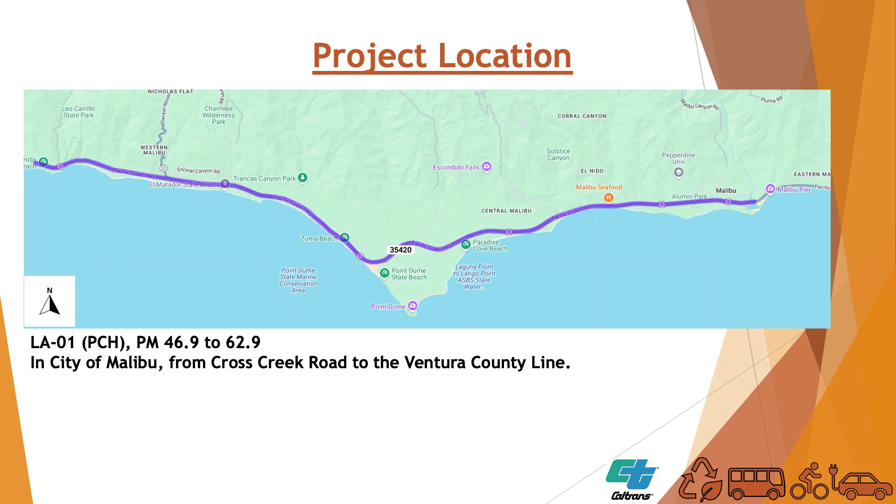The purpose of the project is to fix the pavement. The goal is to extend the surface life of the roadway, improve the ride quality, and that will minimize the maintenance needs, which will minimize the maintenance worker exposure. We understand safety is a major concern on this PCH, so we also incorporate upgrading complete street features and upgrading the safety features.

Next, I'm going to turn it over to our design engineer to go over the proposed scope of work.

As you can see on the exhibits, pavement rehabilitation: we're going to cold plane and overlay with rubberized hot mix asphalt. That's the main purpose of the project, the overlay.

Then we go to complete street elements. We're going to upgrade and add new ADA curb ramps, approximately 20 of them, and we're going to add new sidewalks. If I remember correctly, it's around 6 new sidewalks that do not exist, so we will be adding those. We're going to enhance crosswalk striping. Next is audible pedestrian signals, countdown pedestrian signals, and bicycle detection. And we're going to add class 2 bike lanes at 3 segments.

Next slide, safety items. We're going to upgrade the guardrail system, the existing MBGRs. We're going to install Qwick-Kurbs for traffic channelization. We're going to add 20 new lights throughout the segment. We're going to replace and install new roadway signs within the project limits.

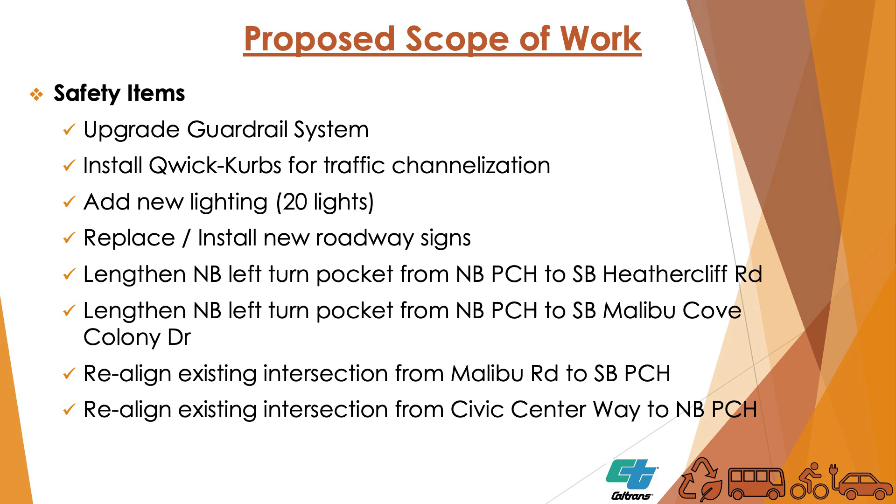We're going to lengthen the left turn pocket from northbound PCH to southbound Heathercliff Road. Then we're also going to lengthen the northbound left turn pocket from northbound PCH to southbound Malibu Cove Colony Drive. And we're going to realign the intersection where southbound PCH meets Malibu Road from a skew to a T intersection. The last one below is we're going to realign the intersection at Civic Center Way to northbound PCH, same thing, from a skew to a 90-degree intersection.

Next slide, design challenges regarding the bike lanes. Widening may require a higher environmental document process, so we're not doing widening on this project, so that's why the bike lane is limited.

Right-of-way constraints - we have a lot of right-of-way constraints. We don't have space to add bike lanes at some locations because we don't own the right-of-way. We have parking constraints, we cannot remove parking. And roadway lane width constraints - the lane widths have to be a certain width. We cannot take away lanes or reduce them further than the standard.

Multiple segments regarding the class 2 bike lanes. We're going to be adding bike lanes and we're going to reduce the lanes to 11 foot, from 12 to 11. And the raised median at many locations throughout this segment, from 12 foot to a 2 foot raised median. That will add space so we can have additional bike lanes.

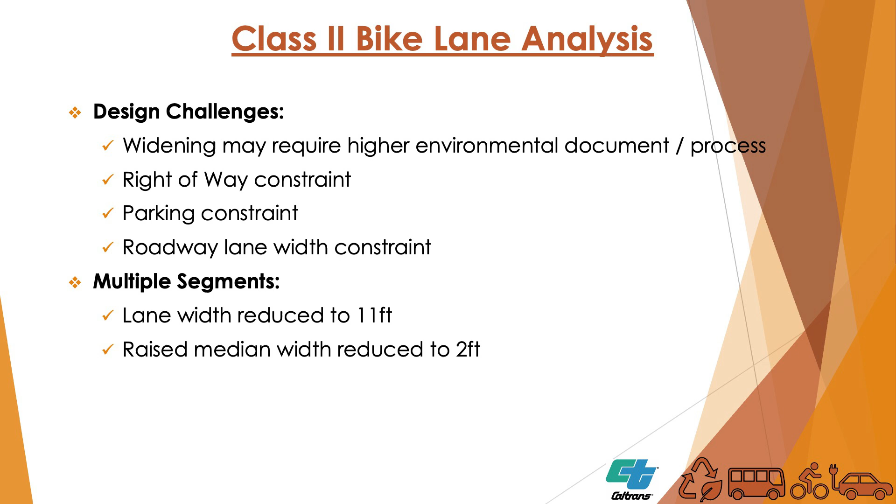Class 2 bike lane throughout this project: going northbound is going to be 22 segments, coming southbound, 22 segments, 22 pieces of bike lanes. If we look at the exhibit, going northbound is about 7.7 miles, coming southbound 7.1 miles. We cannot have it continuous, as I'm going to explain later. It would be nice, but so we have it in segments, the bike lanes, which is 22 in either direction.

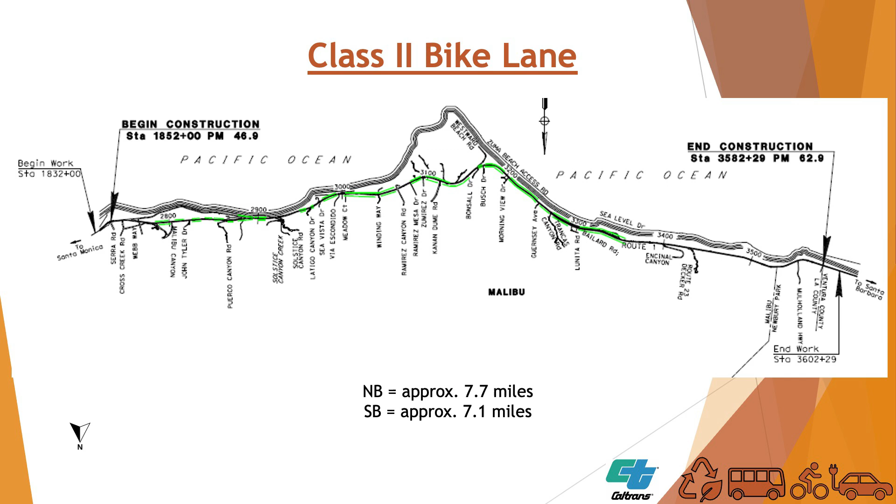Class 2 bike lane cross section, this is a typical section. What is a Class 2 bike lane? Class 2 bike lane is a bike lane by itself, a stripe by itself, next to the shoulder, on the highway. So it's a lane for bike lanes.

Not a protected lane - that's a problem. It's its own lane. How's it protected? There will be time for questions during the Q&A if you just want... I just asked, you kept saying Class 2 bike lane. I understand, yeah, I'm glad we clarified. We'll do questions at the end.

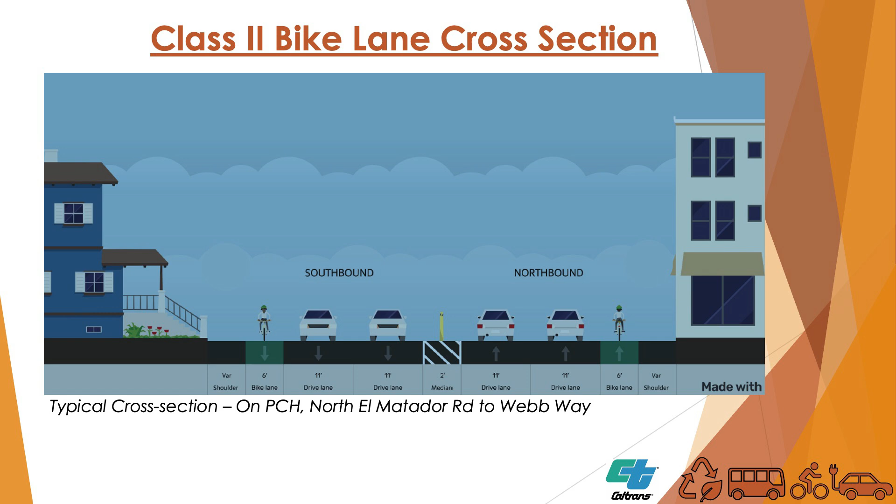Thank you, yes. And this is a typical section of a class 2 bike lane. On northbound PCH, this is within the project limits from El Matador - it's not throughout the project limits, it's from El Matador all the way to Webb Way. We're going to have a bike lane in both directions, as you can see, a bike lane by itself, striped in the northbound and southbound direction. That's for the bike lane section.

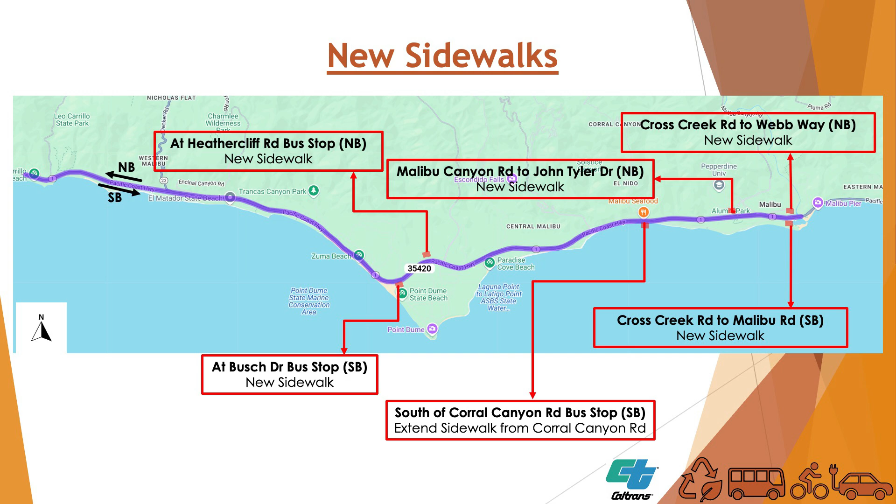Now we can go to the next exhibit. We have new sidewalks. The new sidewalks, as you can see, at 6 different locations. And there are locations where we need sidewalks - we don't have sidewalks, we have a bus stop with no sidewalk. So these sidewalks will provide continuous use for users. 6 new sidewalks throughout these project limits.

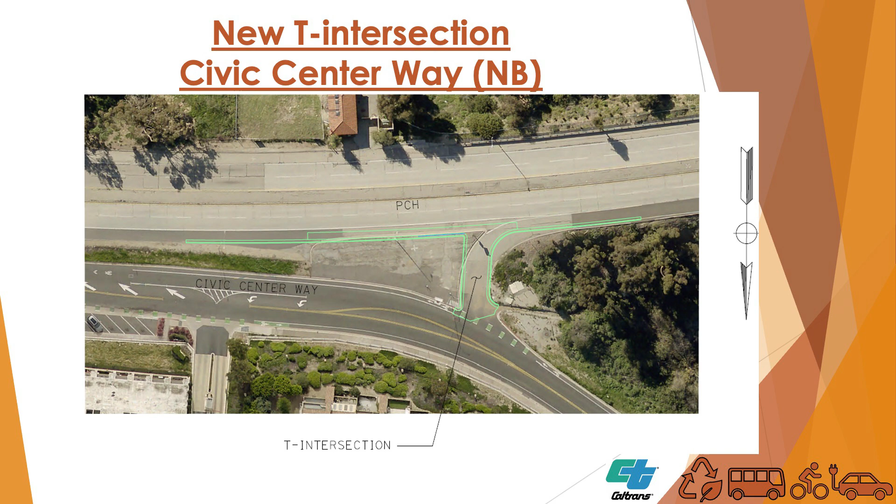This is, as I mentioned before, a new T intersection, Civic Center Way going northbound to PCH. From a skew, it will be a T, a 90-degree intersection, as shown on this exhibit.

Next exhibit, this is a new sidewalk along with a T intersection at Malibu, going southbound, which is on the north side, or the upper side of the exhibit. And on the lower side, we're also adding a sidewalk from Cross Creek all the way to Webb Way.

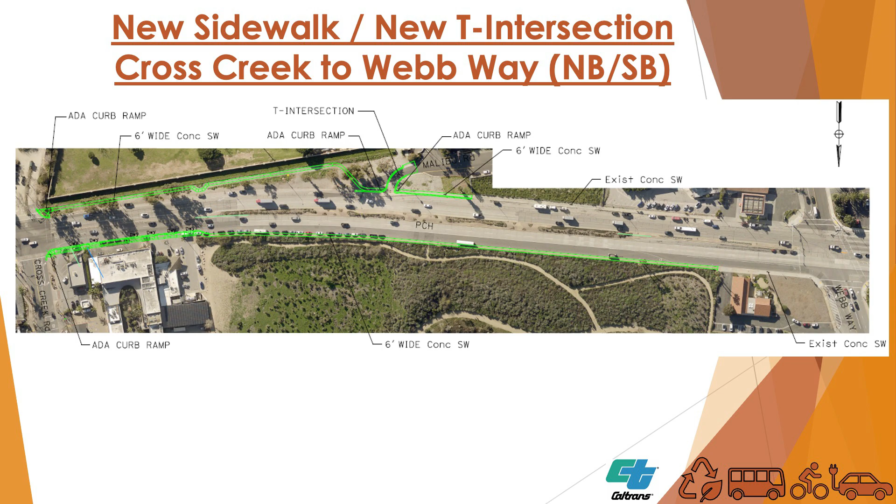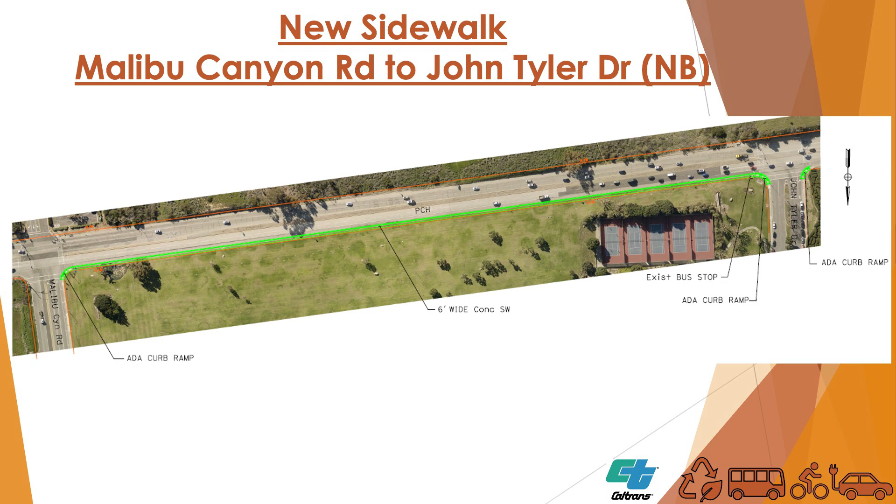So we're adding a sidewalk on both directions, southbound and northbound, and we're adding that intersection. Next slide, new sidewalk from Malibu Canyon Road to John Tyler. Right now it's just a grass area, so we're gonna have a continuous sidewalk from curb ramp to the other curb ramp. Next, a new sidewalk south of Corral Canyon in the southbound direction.

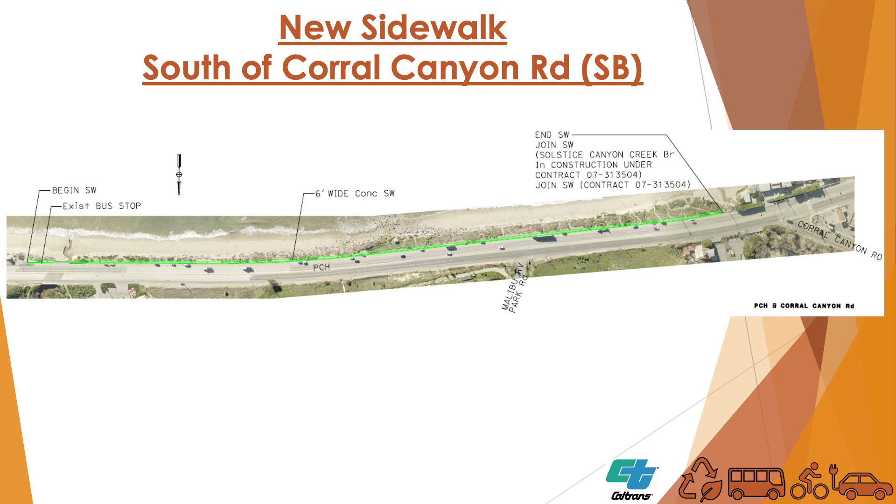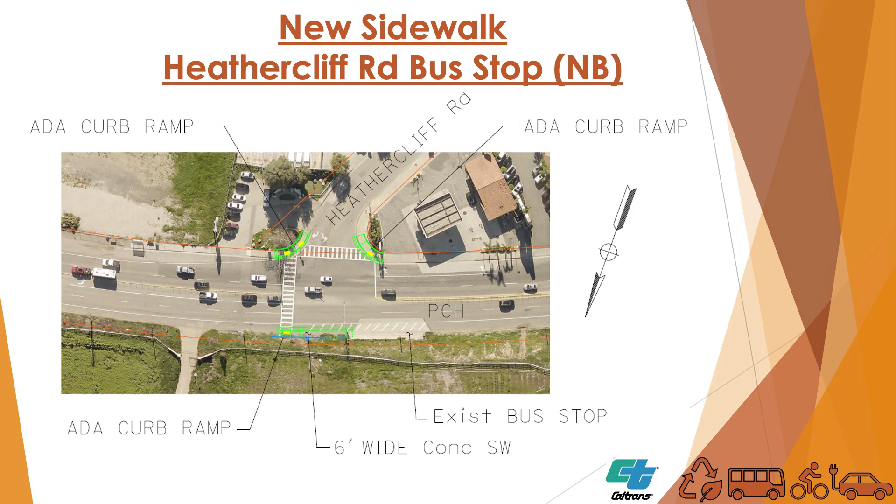The whole stretch, as you can see on the exhibit. Next, we're also gonna have a new sidewalk going northbound on PCH. We have a bus stop at Heathercliff, but from the bus stop to the crosswalk, it's a dirt area. We're gonna add a sidewalk so there's a connection. Also, we're gonna add a sidewalk at Busch Drive. There's a bus stop, there's no sidewalk. We're gonna add a sidewalk there.

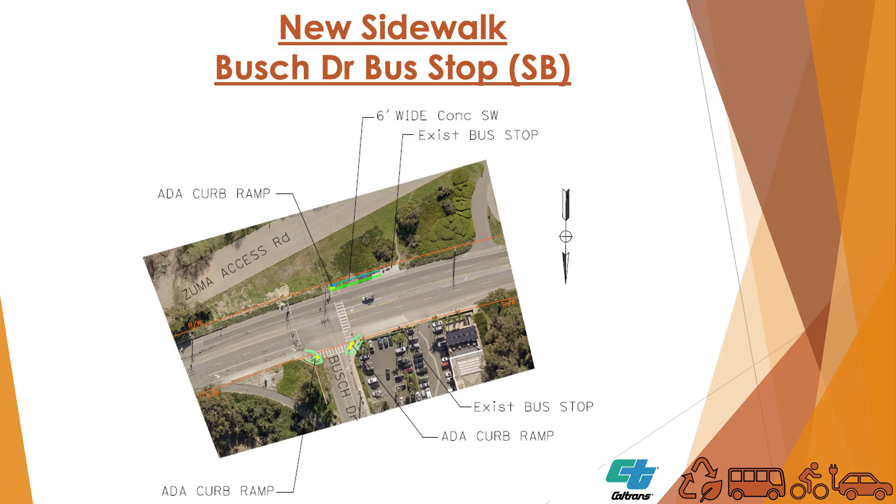Now regarding the project schedule. So project schedule, right now this project is currently in design phase. It started back in 2022. We are targeting to complete it this fall, 2025. Construction will start next summer, 2026. It's about 2 years, so we end around summer 2028.

So that concludes the north segment. Now I'm gonna go on the south segment, and this is from McClure Tunnel to south of Cross Creek. Project location for this one, again, is on PCH. Post mile is 35.2 to 46.9, so it's about 11.7 post mile. This footprint actually crosses over 4 cities, from the south end at the City of Santa Monica to Los Angeles, then to Topanga community, and lastly to the City of Malibu.

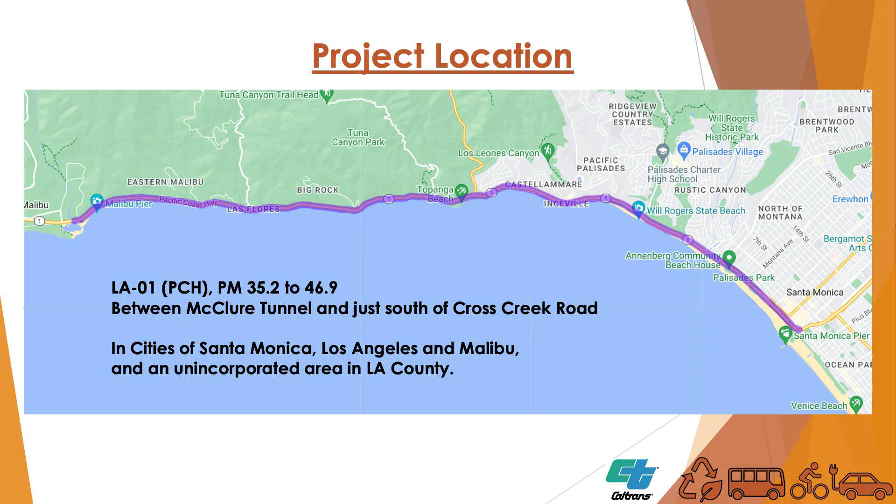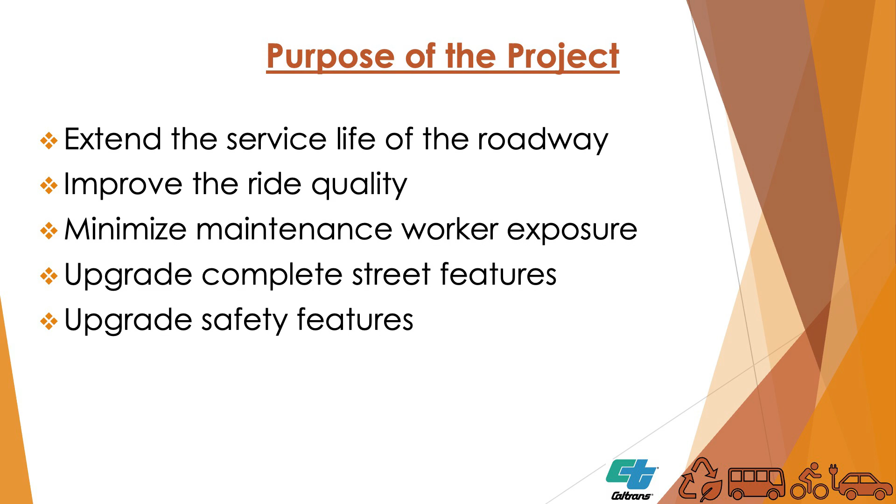Similar to the other project, the purpose of the project is to fix the pavement, extend the service life of the roadway, improve the ride quality, minimize maintenance need and worker exposure. And again, we understand safety is a concern. We are also incorporating and upgrading complete street features and safety features.

Yes, like Janice said, similar to the other segment, we're doing a pavement rehabilitation. We're going to cold plane and overlay with rubberized hot mix asphalt. Second, there are locations where the pavement is damaged, so an overlay will not work. So we're gonna completely replace the structural section at those locations, and transit stop improvement.

There are 30 bus stops that have asphalt pavement. We're gonna remove the asphalt pavement. We're gonna put white concrete, PCC concrete, to make it more durable. That's at the bus stops, 30 of them.

Complete street elements: we're gonna upgrade 22 new ADA curb ramps. We're gonna add new sidewalks and crosswalks at particular locations. We're gonna enhance the crosswalk striping, and same as the other project, audible pedestrian signals, countdown pedestrian signal heads, and bicycle detection. And same as the other project, we're gonna add class 2 bike lanes on this segment also.

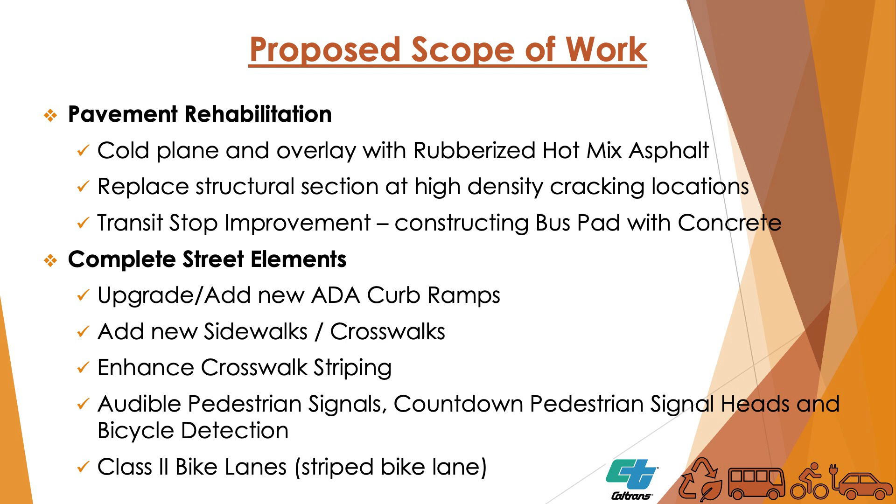Regarding safety items, we're gonna upgrade the guardrail system. We're gonna install Qwick-Kurbs for traffic channelization at 15 locations. We're gonna upgrade the lighting at 2 tunnels, the Roosevelt Tunnel and the Beach Tunnel. We're gonna replace and install new signs throughout the project limits for 12 miles. And we're gonna add CCTV cameras around the Roosevelt Tunnel on the outside for safety.

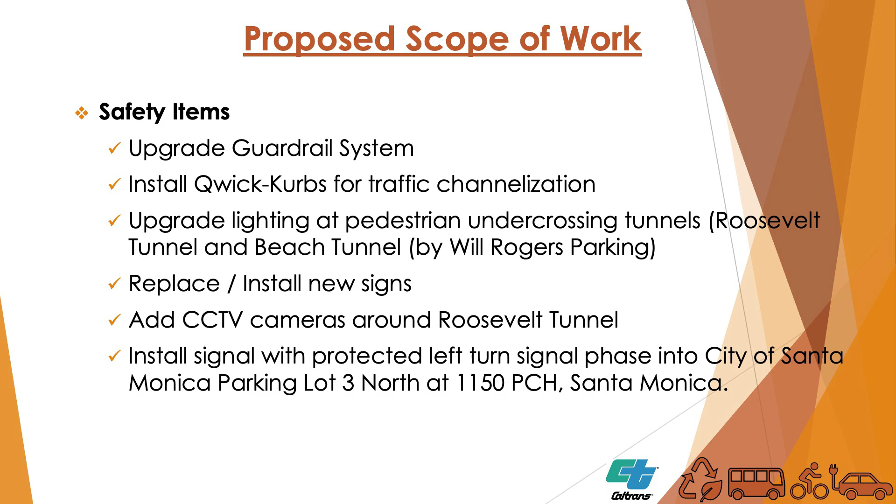And at a particular location, which is going northbound at the City of Santa Monica parking lot 3 North, we're gonna add a signal, a brand new signal for persons to make a left. New bike lane, crosswalk, and sidewalk. Those are the locations, the sidewalks are in red. 1, 2, 3 locations, with 2 locations with sidewalk and crosswalk, 3 locations. And then we're gonna have the bike lanes, 3 locations for bike lanes.

Or can we go to the previous one? I just wanna show the 3 locations, one going northbound and 2 locations northbound and southbound, which is close to the beginning of the project.

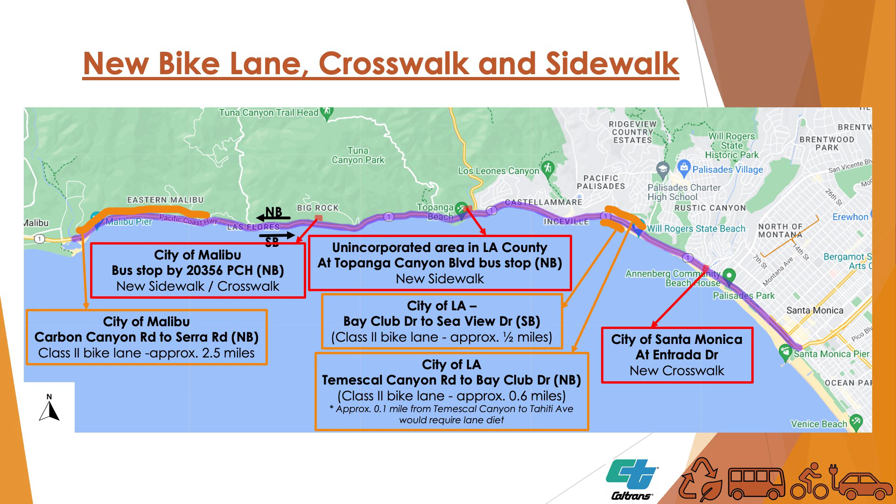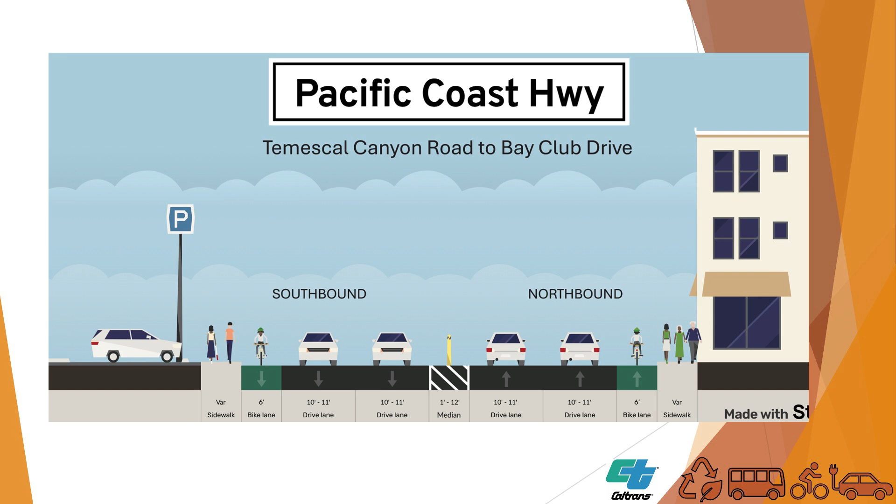Next slide, this is a typical section of the bike lane from Temescal Canyon Road to Bay Club Drive. We're gonna have a bike lane on both directions, southbound and northbound, throughout this stretch between these two streets. Next slide, going northbound from Carbon Canyon all the way to Webb Way, only in the northbound direction we can have a bike lane.

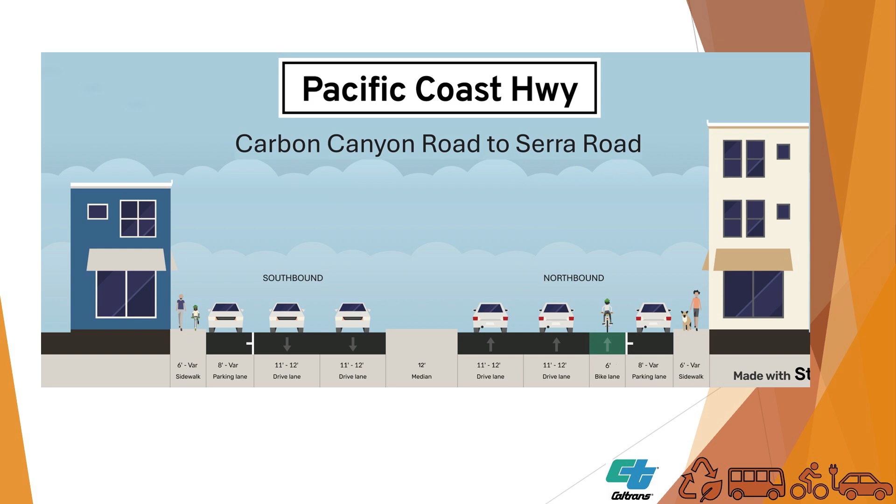This is more in detail of what I mentioned before. New sidewalk and crosswalk at this address, 20356. Sidewalk, we have a bus stop, there is no sidewalk, we're gonna add a sidewalk. Then we're gonna add a crosswalk so persons can cross to the other side.

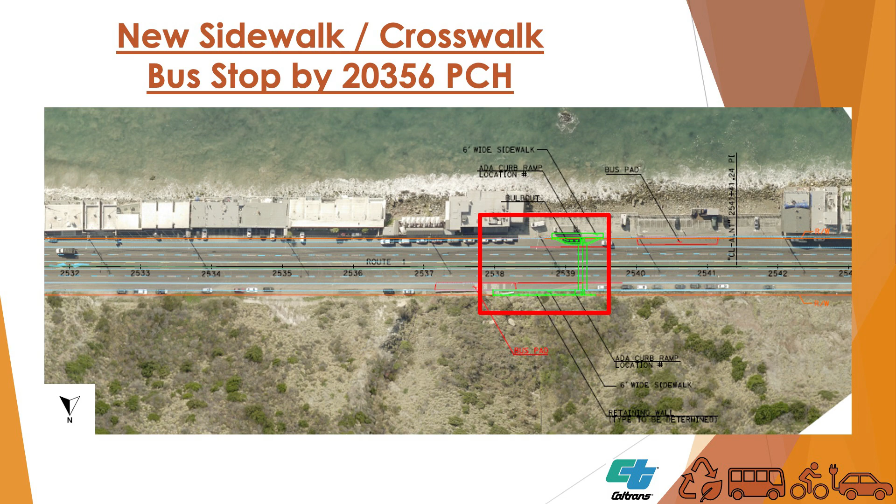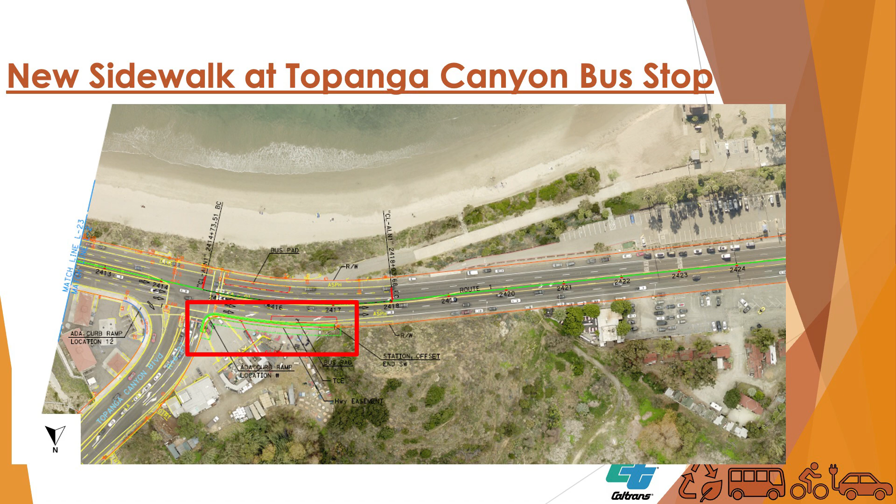At the corner of Topanga Canyon and PCH, a new sidewalk. There is no sidewalk there currently; there used to be a nursery there, so we're going to add a sidewalk. Next, at Entrada Drive, we're going to add a crosswalk with a signal for pedestrians and handicapped persons to cross from one side of PCH to the beach side. This is a new crosswalk.

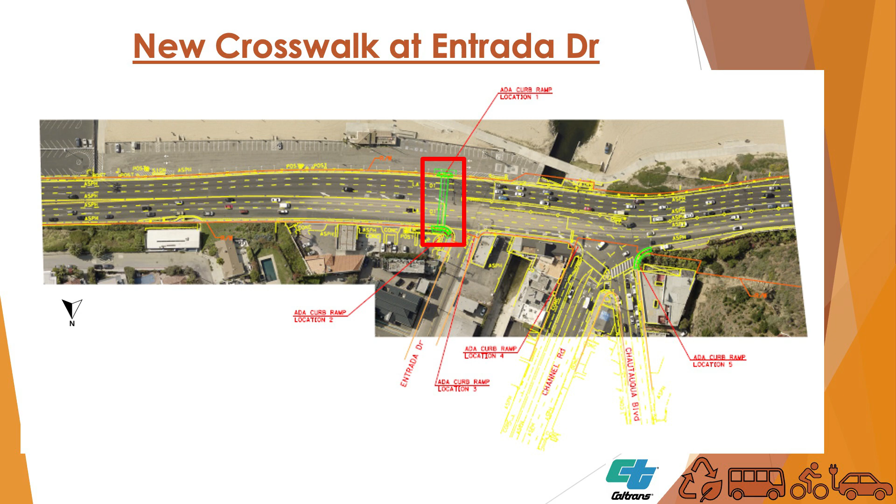Regarding the project schedule: this project is currently in the project approval and environmental document phase. We're finalizing our scope and completing our environmental document. We started summer 2022 and are targeting completion spring 2025. Then design will start, targeting completion winter 2026. Construction will start summer 2027, approximately 2 years, ending around summer 2029.

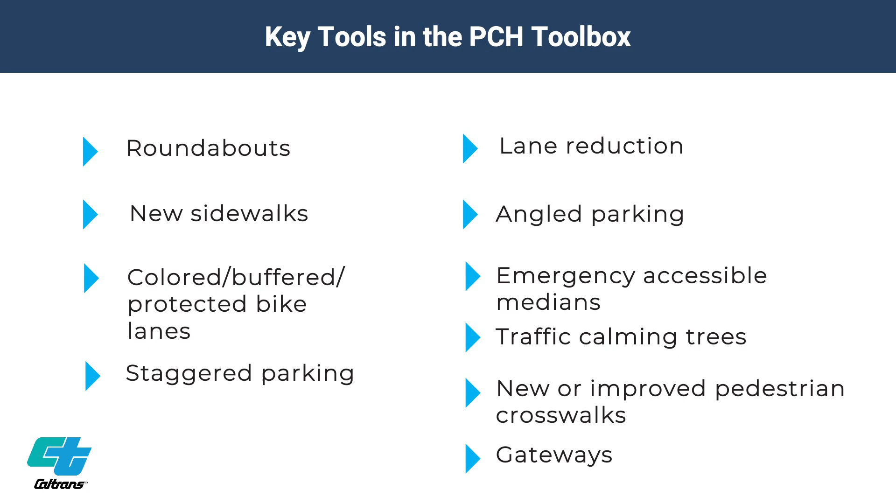So with all of the analysis that we did, crash analysis, we spent time in the field, we talked to you, and have come up with a list of tools in our toolbox that we're applying at different locations - roundabouts, new sidewalks, colored buffered protected bike lanes, staggered parking. We've got lane reductions, angled parking, emergency access medians. We're looking at using traffic calming trees to do that, improved pedestrian crosswalks and gateways. So a set of tools that we're applying here.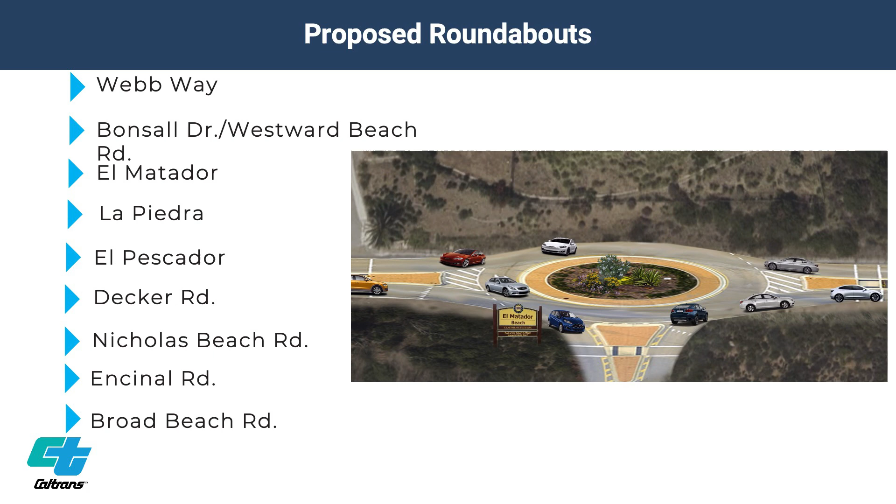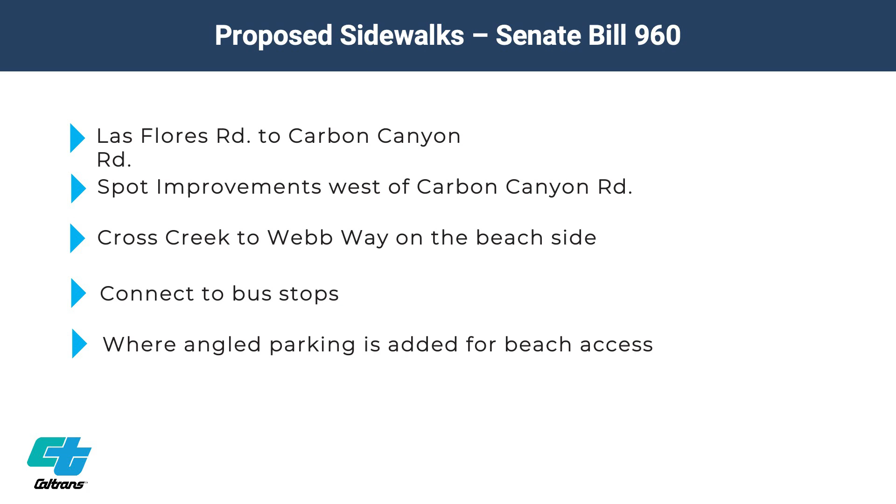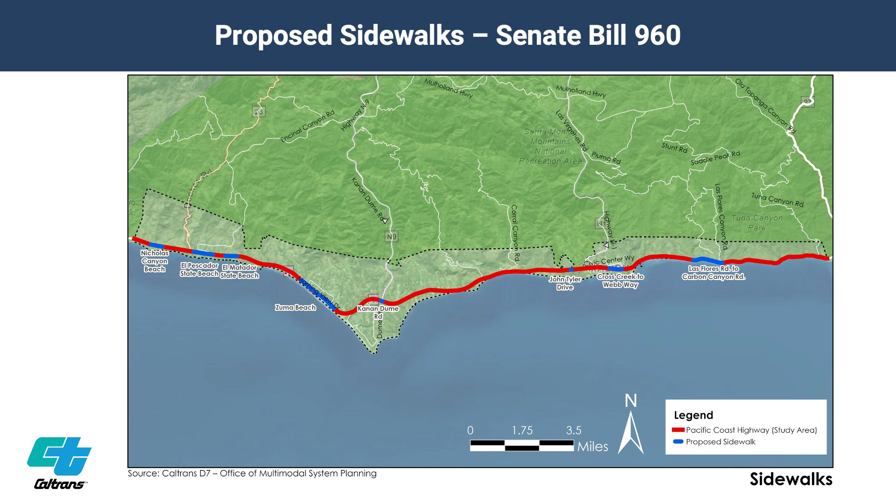We do have some proposed sidewalks, and the biggest sidewalk, or the longest segment of sidewalk that we're proposing, is between Las Flores Road and Carbon Canyon Road. There is no sidewalk there, and that is something that we really have to add per the Americans with Disabilities Act. It's also within Senate Bill 960, so a really important feature there. West of Carbon Canyon Road, there are some spot improvements, some locations where there's very little sidewalk, or there's a sidewalk but there's a mailbox or a tree in the middle of it. Those will have to be remedied.

Cross Creek to Webb Way on the beach side - I think in the other project they're already working on that one - and some of the connections to bus stops will also be done during the capital improvement maintenance projects. We're proposing in some locations angled parking for beach access, and where we've got that, we'd like to add sidewalks so people have a place, so they're not parking on the road and walking along the road to get to the beach. They'll have a sidewalk to walk on.

And the proposed sidewalks here, again, the location between Las Flores and Carbon Canyon. But these are the locations I mentioned. The ones at the north end are really where we're looking at the angled parking and adding parking spaces on the beach side. And these will be places where we would remove parking on the mountain side, just have it on the beach side, but have a place for people to walk there.

We are proposing colored, buffered, or colored and protected bike lanes. And by the way, we've got options. This is a feasibility study, so we've determined what's feasible. For these road segments, in many locations we're showing 2 or 3 potential alternatives, with the selected one to be chosen at a later time.

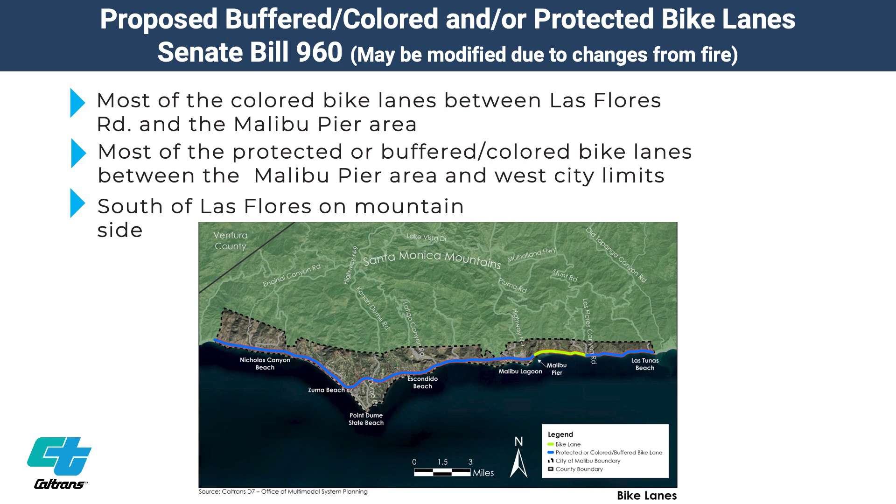But you'll see in the blue there, it's either buffered and colored—a big improvement over what we've got now—or protected. The green area shown is between Las Flores and, I believe, Carbon Beach Terrace, maybe even a bit further north around the pier. There's parking on both sides, and it's really difficult to put protected bike lanes in when there's parking that way, because there's a lot of interference between the parking and the protected bike lanes, plus sight distance issues with people coming in and out of driveways. So in that area, we're really looking at buffered bike lanes.

We're proposing staggered parking. The purpose, and to answer your question Helen about removing parking, is that we're removing parking along some stretches of PCH to accomplish three things. One, we don't want people parking on one side of the road and running across to the other side—a real safety hazard that's very common today. Two, we don't want people parking along the highway and walking along the highway, another common safety hazard. Third, we believe SB 960 is telling us we need to put bike lanes in, and if we don't remove parking on one side, we don't have space for the bike lanes. So this solves three problems.

We've only done this in areas where we believe the parking we have left is adequate to serve the demand that's out there. So it's a trade-off, but we believe the safety issues are worth the trade-off in these locations. And we'll see later on that we've actually added quite a bit of parking.

Here's a place where we're leaving the parking on the beach side in the map, like Latigo Canyon. The Latigo Beach, Winding Way, Paradise Cove area is really where this comes out the most—leaving parking on the beach side where it's most needed. Where we've got the Winding Way trailhead to Escondido Falls, we left parking on the mountainside because people need to park on that side, but not the other side. So we've gained the space from removing parking in those locations.

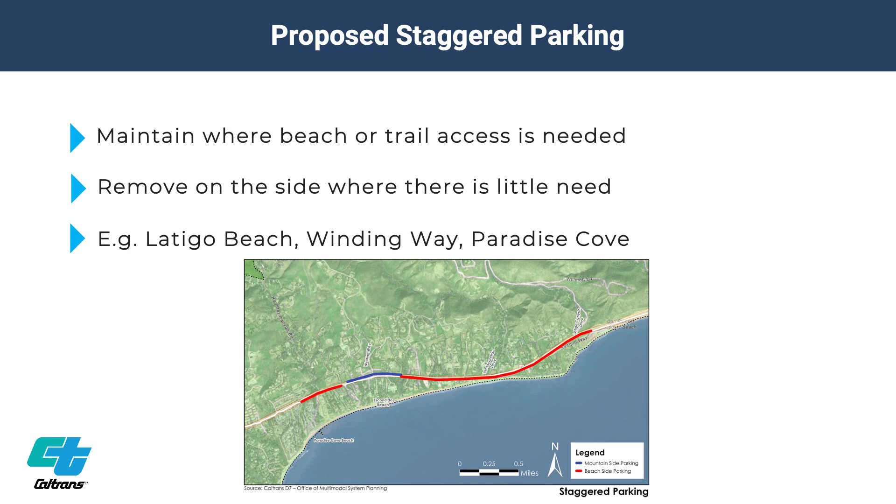Proposed lane reductions with some angled parking. Once we get west or north of Trancas Canyon, whichever you want to call it, traffic volumes come down quite a bit. So we're proposing to come down to one lane in each direction, or one lane with a passing lane in some locations. This gives us space for the bike lanes, but again, angled parking on the beach side—so we're actually adding parking. I'll show a table on this a little bit later on, but it comes along with parking on just the beach side.

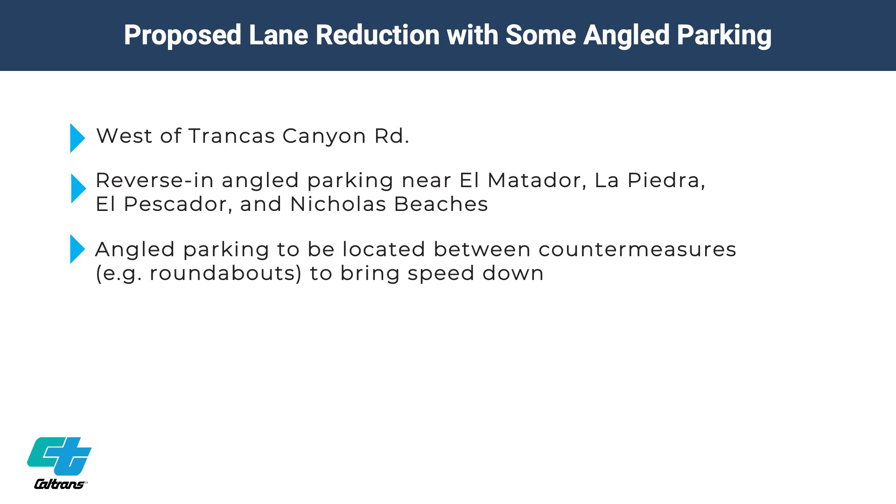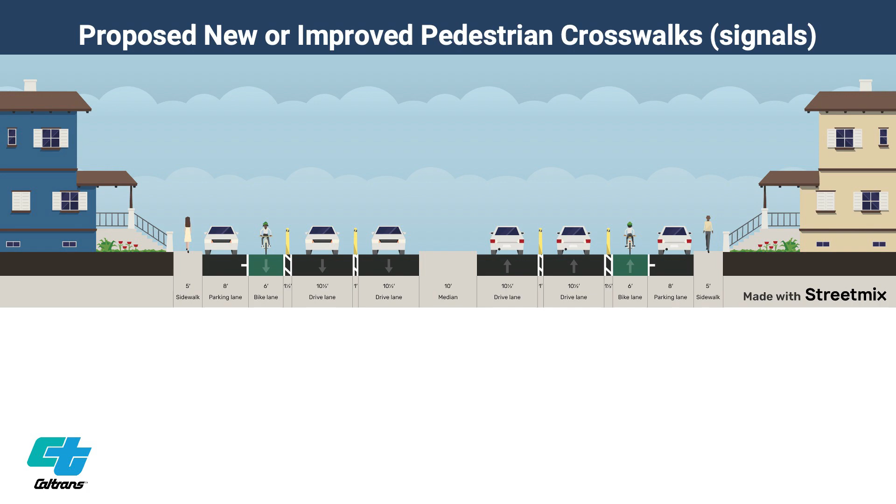So the new and improved crosswalks, especially in the area between Las Flores and Carbon Beach Terrace, where a lot of crashes have occurred and there are speed issues—we're trying to do a number of things. We're trying to make it safer to cross the highway, but we're also trying to introduce things like quick curb delineators to channelize the traffic and slow the cars down at the crosswalk. Here's a potential treatment where we've got the channelization, the bike lanes, crossing islands, and possibly even a speed table we're going to look at. This type of treatment in that area with a lot of speeding, we believe, can help slow the traffic down and make it a much safer crossing. If we've got several of these, it should have some impact on slowing traffic throughout that area.

And we're adding—so you asked, Damon, about the Rambla Vista bus stop.

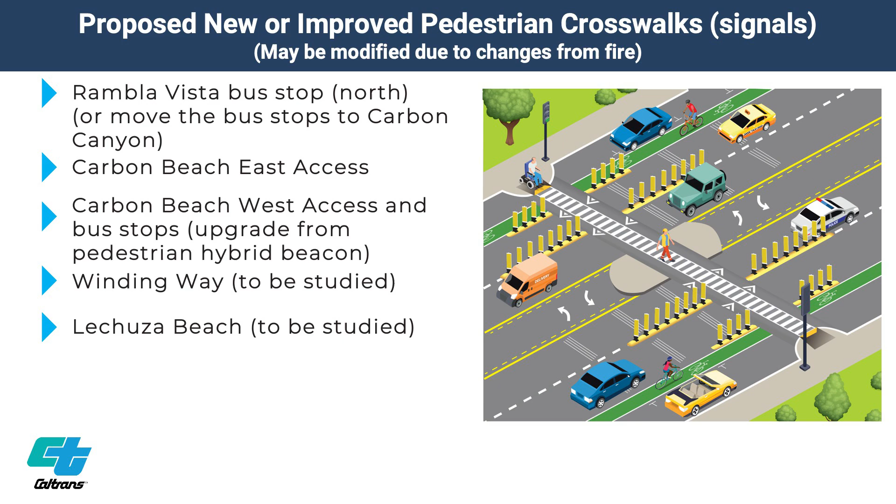Either add a crosswalk there or move the bus stop to Carbon Canyon. That's the other option in that location. At Carbon Beach east access, we're going to have an improved access or crossing. At Carbon Beach west access, there's a crossing there now, but we're going to upgrade it to a full signal and this type of treatment. Winding Way is to be studied, and Lechuza Beach is to be studied. Those are also possible new crosswalks.

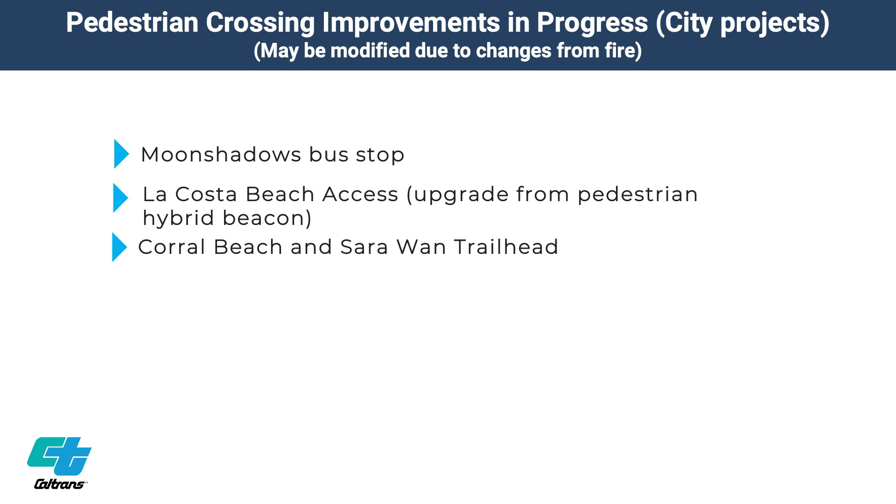Some other crossing improvements that we have, and these are already things the city's working on: the Moonshadows bus stop, which the team here is already putting in. The La Costa Beach access is upgraded from a hybrid beacon to a full signal. And then at Corral Beach and Sara Wan Trailhead, a crossing there as well.

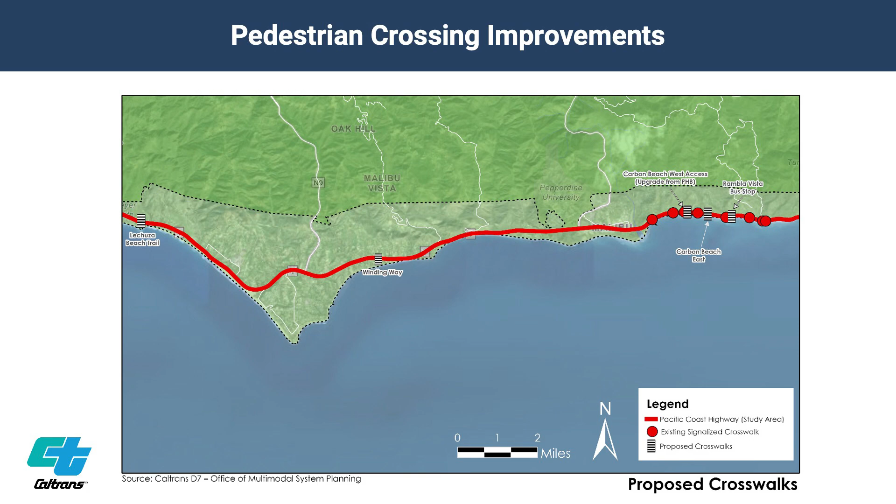We don't know, and as you'll see in some of these slides I put in, the fire may have changed what actually gets done, because we don't know at this point what's going to happen with rebuilding of Moonshadows or the residential properties or anything. So we have to proceed with what we know for now. It's an open question. This is a map showing the pedestrian crossing improvements.

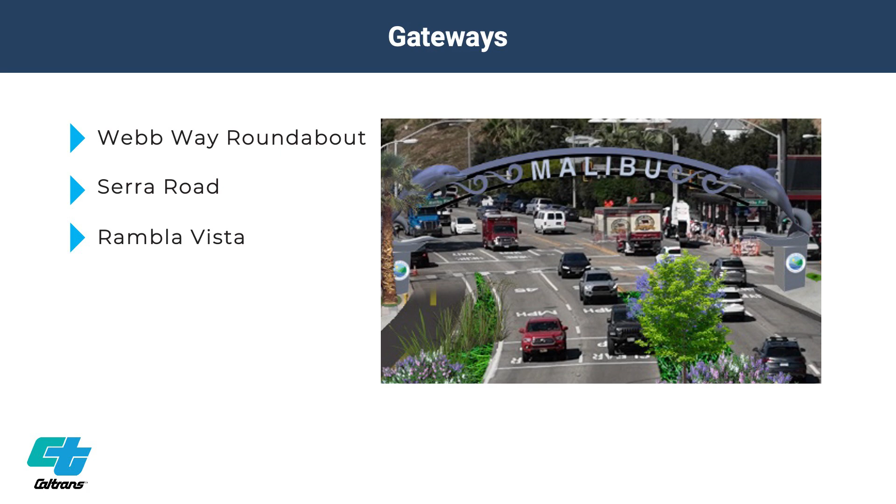Gateways were something that we floated as an idea, and it was really popular, both in the workshops and in the surveys. We like the idea of gateways. They're an opportunity to help do what we call bringing character to the community, placemaking, and they could be an opportunity for public art. This is just a sample of a could-be gateway with some dolphins on it, but these could be art projects that reflect the character of Malibu.

One of the things I know you're trying to do with this project is transform this from a big highway to something that fits within the context better, and this is an opportunity to do that. Gateways also slow cars down. People understand when they go through a gateway that they're entering a new context, and we want them to understand that. It's a tool to help do that.

So we're looking at three possible locations for gateways. One, the Webb Way roundabout, will be like a gateway itself, but Serra Road and Rambla Vista are also possible locations, and more could be put in as well.

Now we have cross sections for the entire length of PCH in Malibu, and I could show you all of them. In the interest of time, I'm going to show some samples, but I've got other slides hidden in case there are any segments you want to see that you don't see. These are some samples of the types of things we're proposing for every segment.

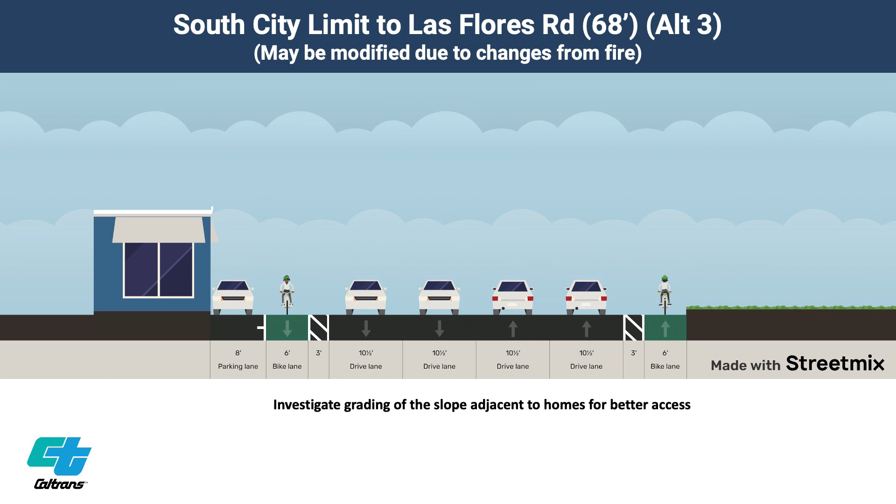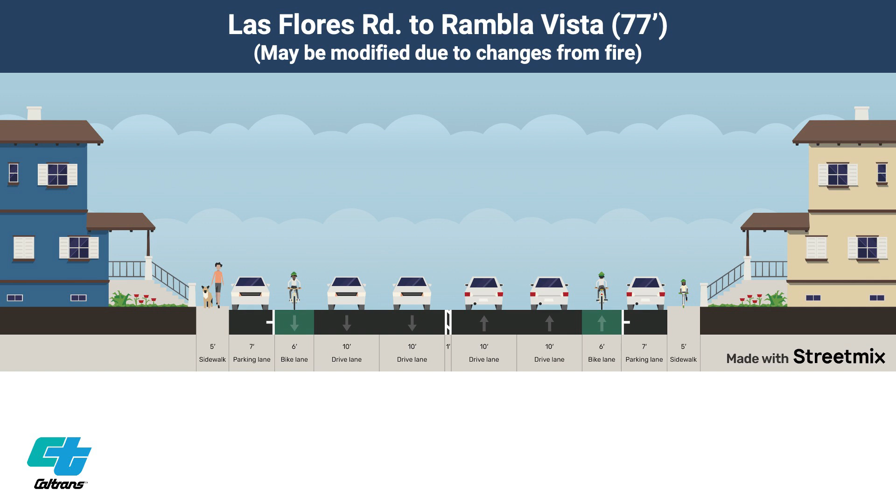From Las Flores to Rambla Vista, we don't have a lot of options because it's narrow. Again, there are no sidewalks at all, no bike lanes at all, and I know there are concerns about turning out of driveways. The trade-off we have to make here is to remove the center turn lane, but that gives us enough space to add sidewalks and bike lanes. With Americans with Disabilities Act regulations and Senate Bill 960, we believe this is something we pretty much have to do, so this is what we're proposing there.

But if the fire changes anything, who knows what can happen along that segment. Rambla Vista to Carbon Beach Terrace, several options again: a protected buffer, or colored buffered bike lanes, with the buffer being a painted buffer.

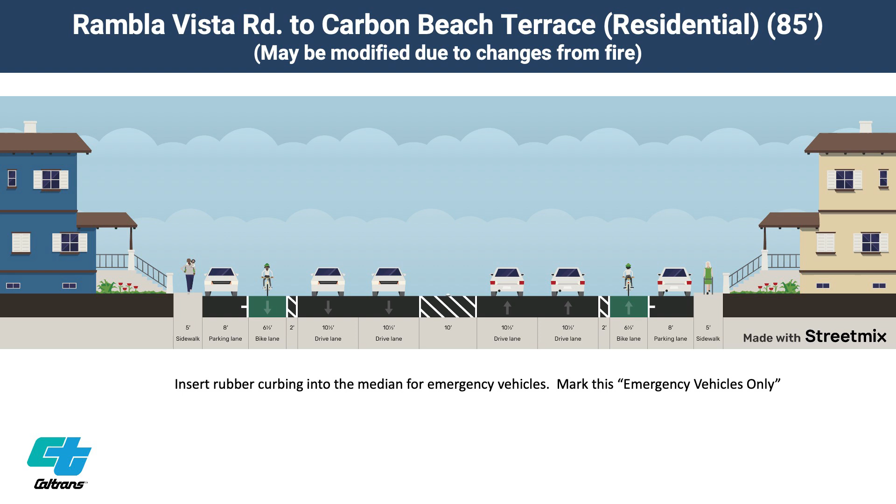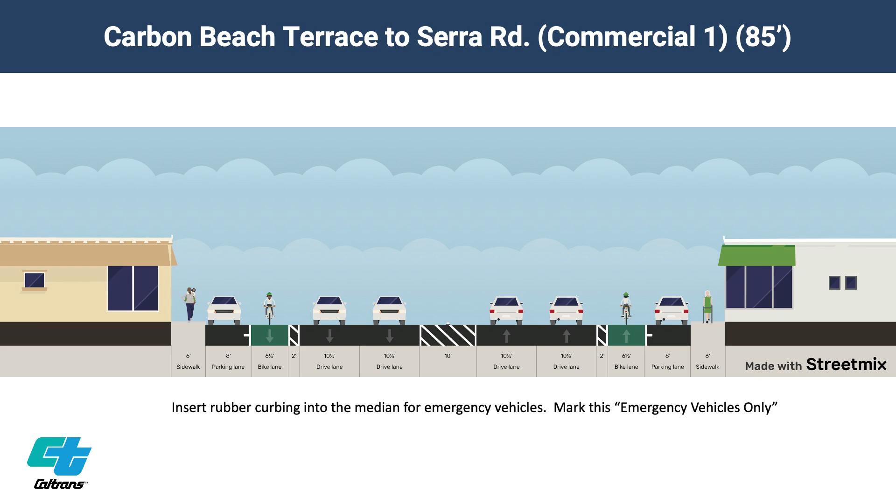Carbon Beach Terrace to Serra Road, getting into the more commercial section. Buffered bike lanes on both sides, and the city would like this to be an emergency lane in the middle. That's a possibility, with some barriers on the side, quick curb type treatments on the side of this.

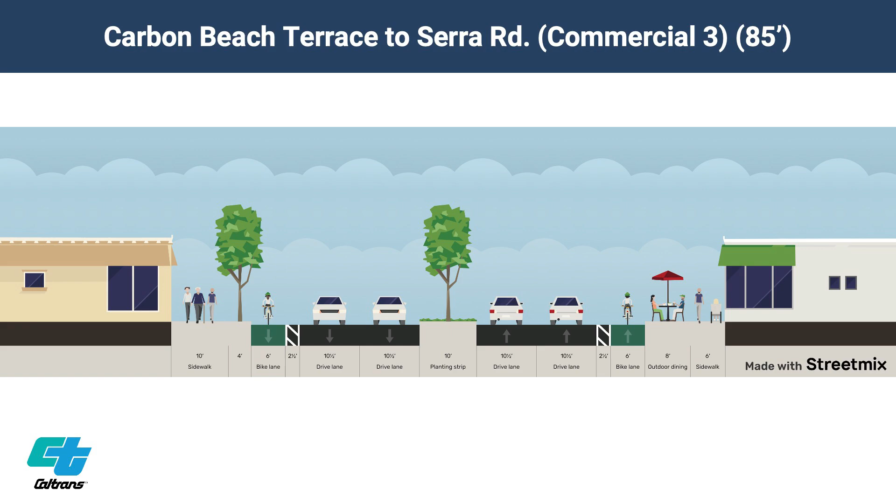If we want to be even more ambitious with this type of placemaking or main street making, take out parking altogether and widen the sidewalks, put in more landscaping and outdoor seating and dining and that sort of thing. Here's a rendering of what that might look like, just one concept.

These are trade-offs, and a lot of these things are all about trade-offs. That's how we tried to frame the community discussion - we've got so much right-of-way, and so many things we're trying to accomplish at different places. How do we maximize what we're trying to do?

The trade-off here is that emergency access will be more difficult. If we're going to widen the sidewalk, that's a real benefit to the sidewalk and to the feel and character of the place, but the parking is sacrificed. So, trade-offs, and decisions to be made later on as to exactly what happens here. But we've looked at the options.

Moving along Serra Road to Cross Creek, we could do protected bike lanes there. It's wide enough. Another alternative would be the colored buffered lanes, and it's wide enough for pretty wide bike lanes here.

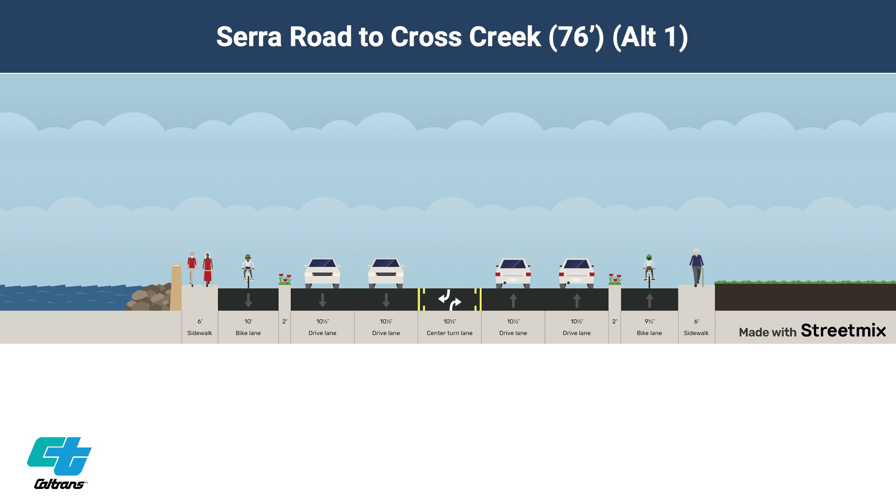Then Cross Creek to Webb Way - this is also very wide. We have enough space here where we could put angled parking in and use that for access to the beach.

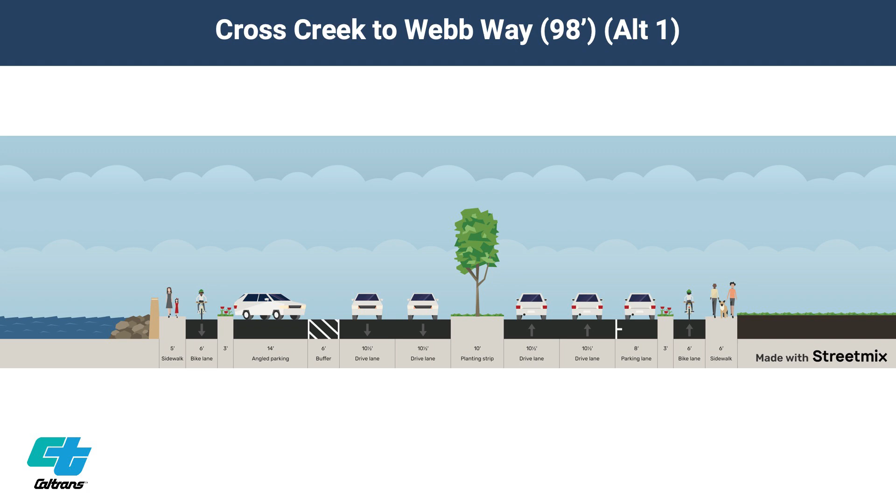One of the challenges we're running into - Coastal Commission and MRCA want us to keep as much parking access as possible. So we've taken a significant amount of parking out in different locations. We're looking for places where we can add parking, such as this, and this is in a very critical area where people could get to the beach. They could also crosswalk over to the commercial area here.

Protected bike lanes are an option there, and again, the colored buffered bike lanes are another option there.

Latigo Canyon to approximately 1,800 feet south of Morning View Drive - this is really getting close to Zuma Beach from Latigo Canyon. And this is the stretch where I showed you the staggered parking.

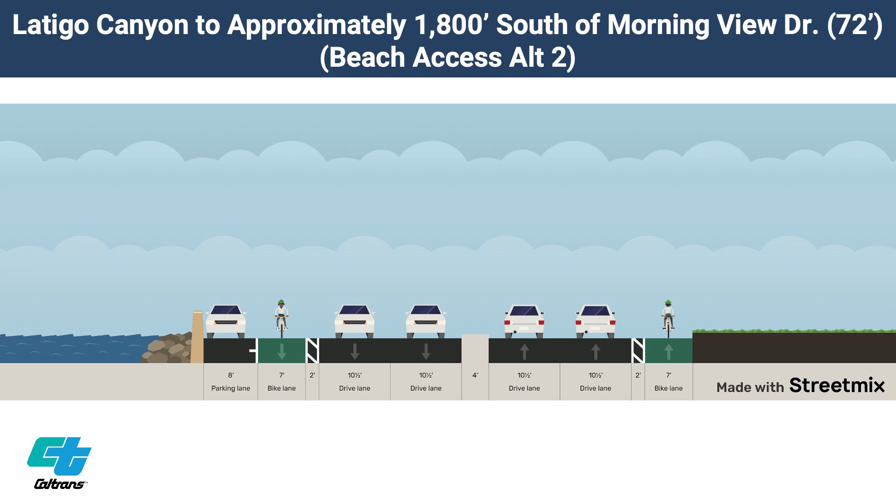We've got an option for protected bike lanes. In one place, the parking on the mountainside would be in the Winding Way area, and parking on the beach side would be the other areas, closer to Latigo Canyon and closer to Paradise Cove. Again, the option for both protected or buffered bike lanes.

Okay, now this is really the Zuma Beach area. We've got several options here, but on the beach side there's a lot of space right there that right now is just sort of dirt. We think that could be an opportunity to replace some of the parking that we've taken out in other places and put in angled parking there.

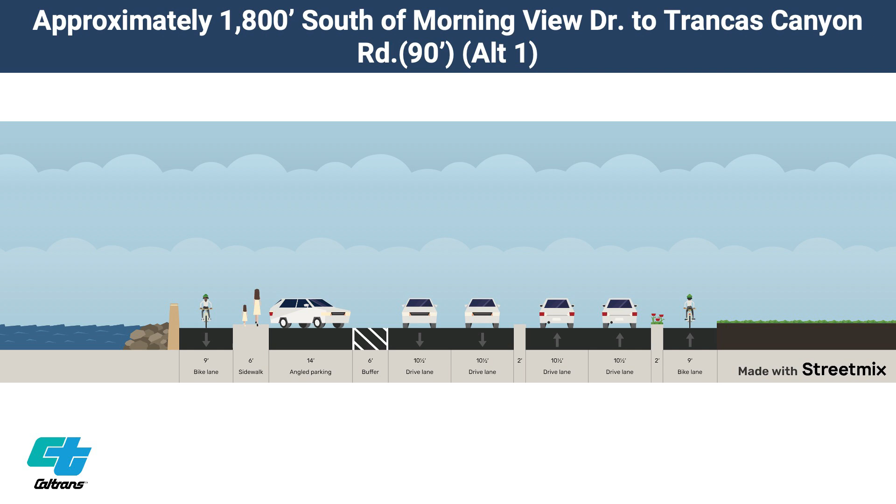A place where we could put in protected bike lanes, or again, the buffered and colored bike lanes is another option. And then El Matador to the north city limit.

Again, this is where we're coming down to one lane in each direction, with angled parking on the beach side where there's beach, not the whole stretch but where there is beach. This could be done here, and it could be done with protected bike lanes and a sidewalk, or with the colored buffered bike lanes. But we would also add a sidewalk on the beach side.

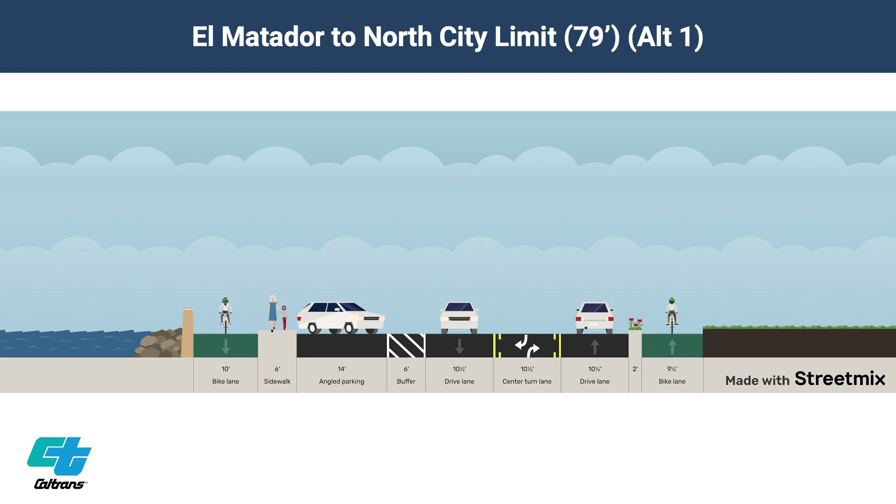Now, those were the linear cross sections that we looked at. And again, we've got others in there. If you want to see them, we could unhide those slides and bring those up.

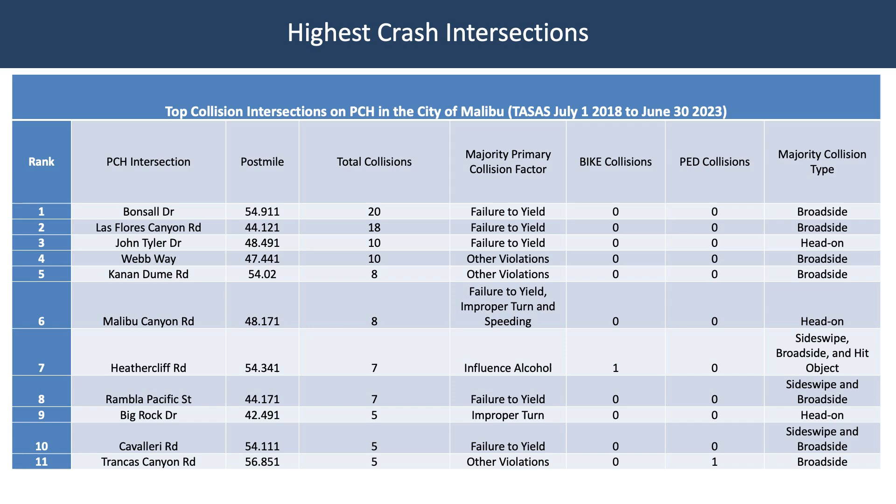But we also looked at intersections at the highest crash locations, the top 11 intersections, and applied a set of intersection countermeasures to these. I've got slides of all of them, but I left the ones I thought you might be most interested in.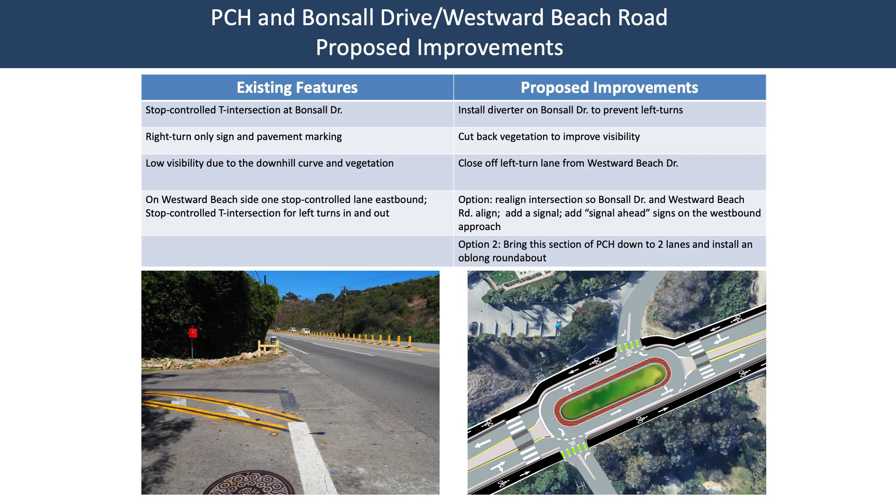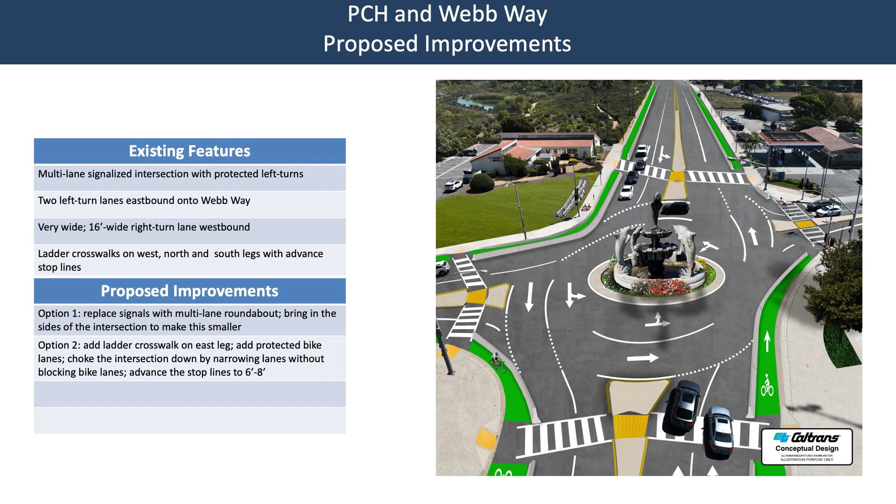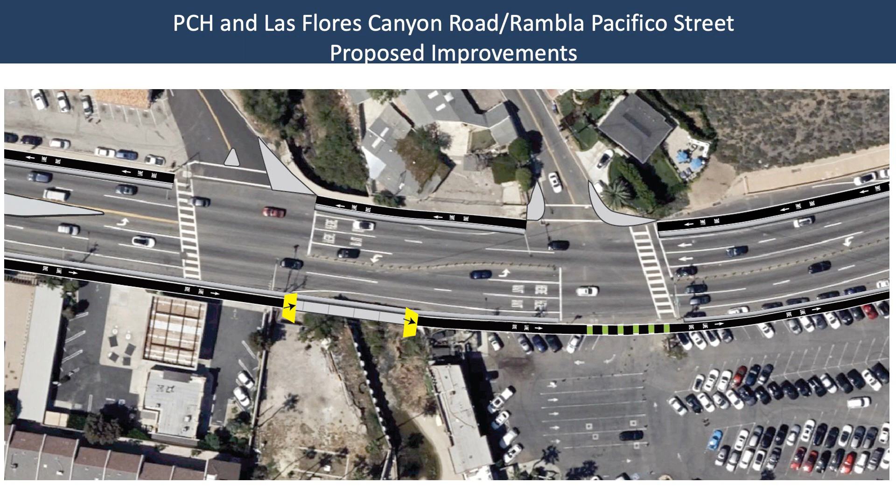And on the T intersections, choking those curbs down some, putting in curb extensions so those crossings are shorter. We've noticed people speeding through this intersection and turning in, and even over here, cutting straight across really fast. So the curb extension would, along with an island in the middle, channelize traffic coming in there—they'd have to slow down quite a bit to go through.

Same thing, putting in a bit of a median island over there to slow vehicles down and channelize them, choking the intersection down some. I know the city's working on other projects at this location—we're looking at putting a sidewalk over the bridge there. I know there are other bridge projects in place too, so that might take the place of this, but this is what we're trying to do here.

We're also looking at things like—there's certain things we can do today with the toolbox we have, but I really believe we're going to be able to do more with what we're calling V2X, Vehicle to Everything Communication.

Some examples: speed enforcement cameras, which are already going in, but cameras that communicate in real time with the sheriff. So if somebody's going 80 miles an hour, sheriffs can find out right away and track them down. Today's technology will allow for communications to warn of safety hazards, but only when motorists have transponders. So this is going to be an important feature of this kind of communication technology, once every vehicle has a transponder that can communicate with the infrastructure.

The parking analysis. So these locations, the first 3 locations up above, show where we took out some parking spaces in the plan. So we removed about 1,375 parking spaces, plus or minus some. But we've gained altogether a net gain of 900 spaces with the angled parking.

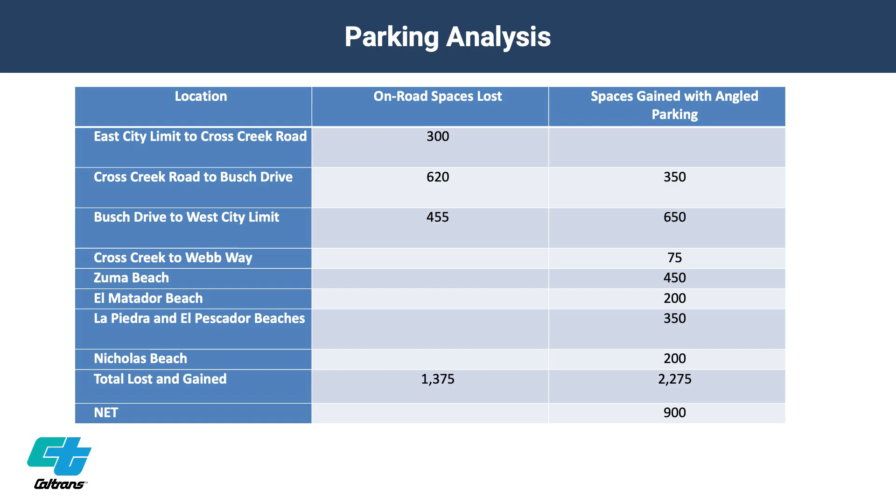Again, trying to respond to the Coastal Commission, MRCA, about take parking away, you have to replace it somewhere. It's not in the exact same location, but we're trying to address that issue of access that they're wanting. So we've actually gained 900 auto parking spaces, and we're proposing another 300 and some bicycle parking spaces too. If we've got decent bicycle access there, people will bicycle more than they are now. And having convenient parking out there will be part of that parking inventory as well.

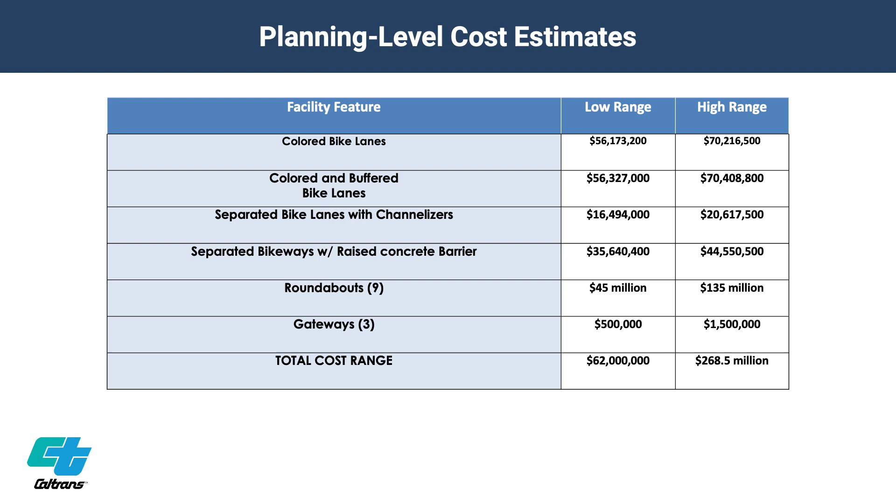We've got planning level cost estimates for these things, and it ranges really wide. Depending on what all goes in, we're looking at sort of the low end of 62 million and a high end of $268 million for all of these features. Again, depending on what exactly goes in and price of concrete at the time and other things like that. But that's kind of where we're looking at for the range.

We've identified funding sources, some state and federal sources, some local sources that are out there. And then we do have, this is challenging here, a phased plan. So we've got sort of shorter term, medium term and long term, but so much of this is going to depend on when funding becomes available. If funding became available quickly, then this plan should go in much quicker. But a lot of it's just going to depend on when the city is able to get the funding and Caltrans is able to get the funding to do this.

So some of the things we're looking at for short term, some of the high visibility crosswalks, speed reduction bars, a lot of paint type things, Qwick Kurbs, feedback signs, colored bike lanes, that sort of thing.

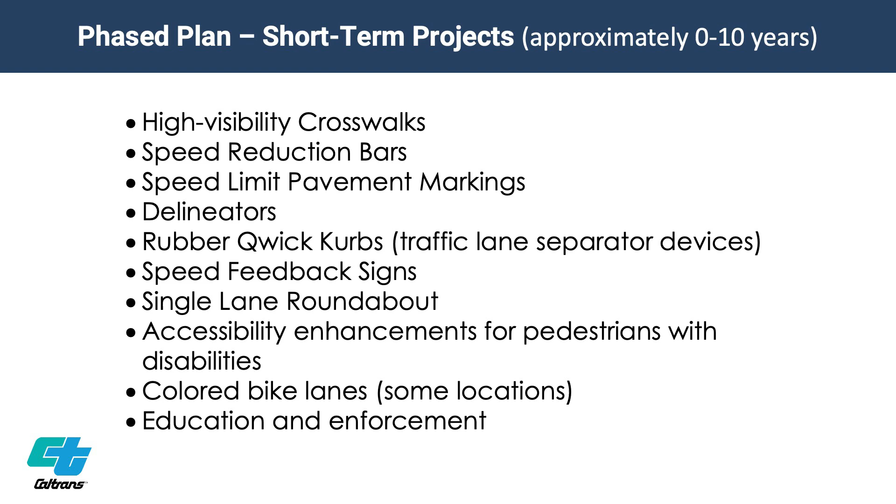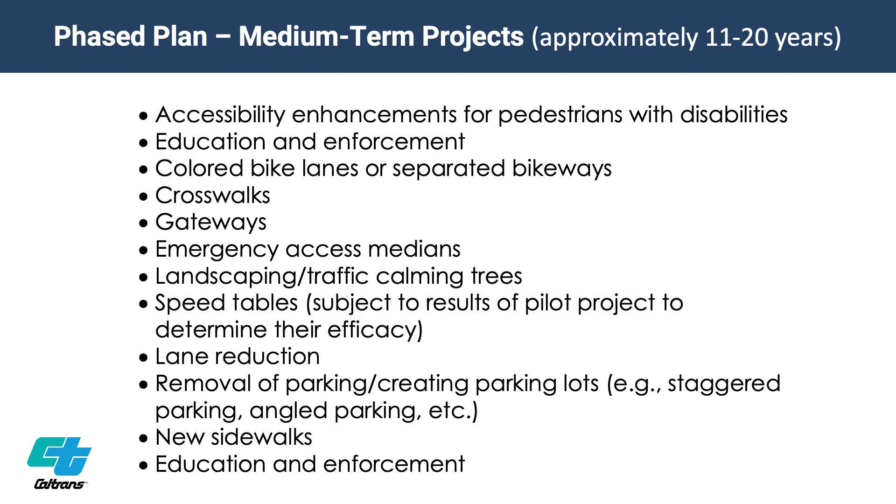And then sort of medium term, getting into some more accessibility enhancements, colored bike lanes or separated bikeways, some of the crosswalks, gateways, and landscaping, speed tables, lane reduction, removal of parking with the staggered parking and the like, new sidewalks.